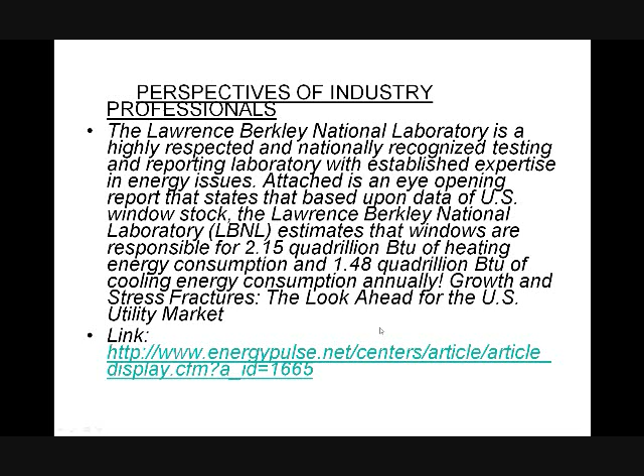Lawrence Berkeley National Laboratory is probably the most respected laboratory in the world on energy efficiency issues and windows. In 2003, they did an in-depth study and found that in the United States alone, windows were estimated to be responsible for 2.15 quadrillion BTUs of heating energy consumption and another 1.48 quadrillion BTUs of cooling energy consumption in one year. We're not talking billions and trillions like the debts and bank bailouts, we're talking quadrillions, a significantly higher number. This is a massive amount of energy loss.

ASHRAE has another way of looking at that. ASHRAE is the American Society of Heating, Refrigerating and Air Conditioning Engineers, and they do great work. What they determined was that windows are responsible for 53% of the heating loss in a building, even though they're only about 18% of the surface. So you can see a massive amount of energy loss through windows and skylights.

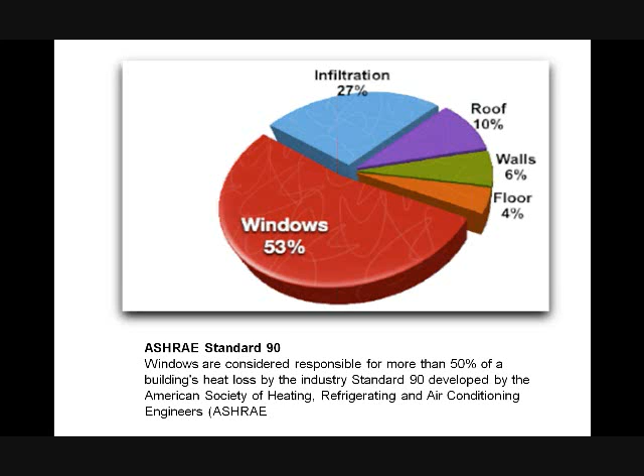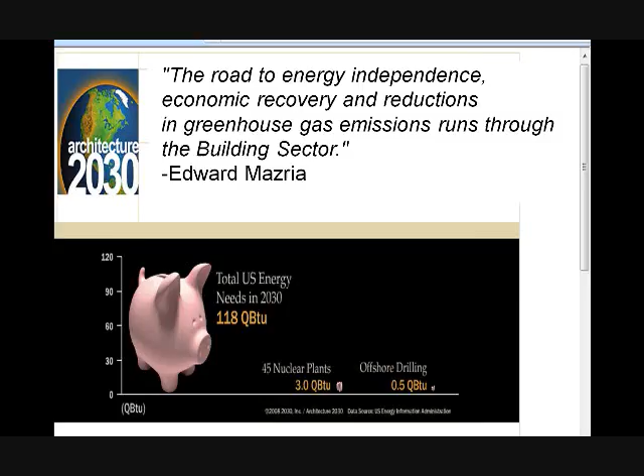Architecture 2030 is a very advanced group on energy efficiency issues, a group of architects very concerned about energy efficiency and clean air. They determined in a study that if we put on 45 more nuclear plants in the United States and doubled our offshore drilling, that would only allow us to address 3% of our energy needs by the year 2030. However, if we make our buildings and homes much more energy efficient, we can address 11 times more, 33% of our energy needs by 2030. That's why Edward Mazria, president of Architecture 2030, said the road to energy independence, economic recovery, and reductions in greenhouse gas emissions runs through the building sector. Greenhouse gas emissions are largely attributed to buildings.

What we have right now in the world is a multi-trillion-dollar wake-up call. McKinsey and Company did a survey showing that climate change initiatives will have a huge impact and create an industry worth $7 trillion. Energy efficient products like Inflector can have a major impact on carbon emissions, so by becoming part of this industry, you can become part of a multi-trillion-dollar industry.

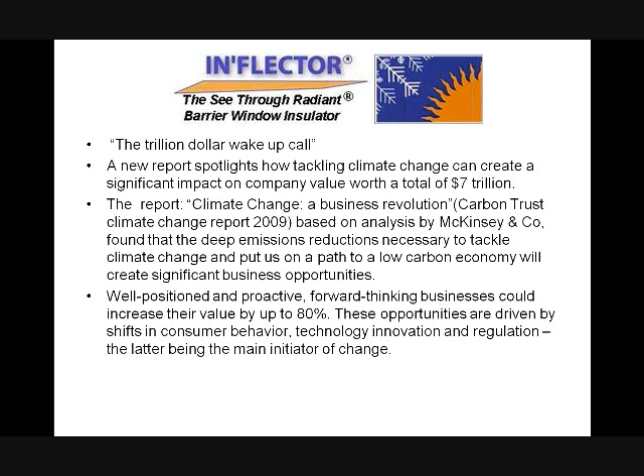The technology that we're going to be looking at today has the potential to be the primary source of energy demand reduction globally and a major source of decreased emissions. After all, the cleanest energy is the energy you conserve. Window insulators can, should, and will be a force of global energy independence.

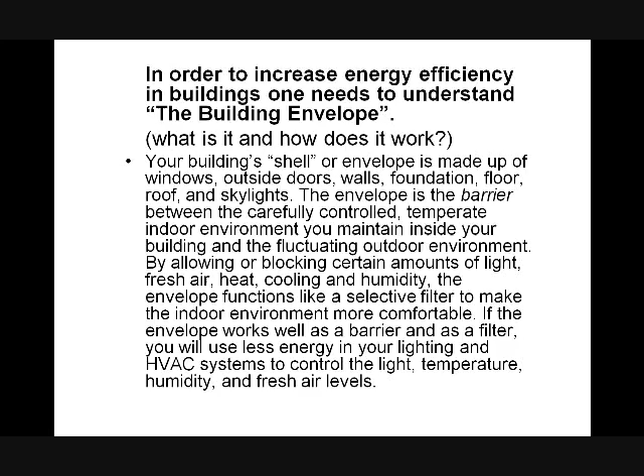The cost-saving objective is this: money in your pocket. This is a great tool that Inflector window insulators provide, simply because the building will lose heat in cold weather and gain it when it's hot outside. Your basic cost-saving objective is to minimize the cost to correct these losses and gains.

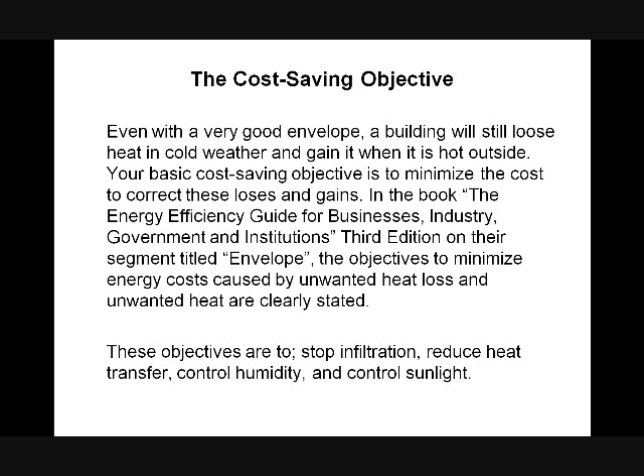According to the Energy Efficiency Guide for Business, the objective is to minimize energy costs caused by unwanted heat and loss. We need to stop the infiltration, reduce the heat transfer, control the humidity, and control the sunlight. In stopping the infiltration, we prevent the leaking in of outside air, and likewise prevent the leaking out of inside air, which you've paid to treat either through a heating or cooling process.

Reduce heat transfer, thereby minimizing the transfer of heat through the materials in the building envelope, whether it be the roof or the walls. Heat always flows from the warmer environment to the colder one, so it's based upon an R value, which is a measure of resistance to heat flow. This is sort of confusing: we have walls, attic insulation, everything rated in R value except for windows, which use U value. This is what the window industry does to confuse us. There's a formula to translate that, but in simplicity, windows have an R rating of between 1 and 5.

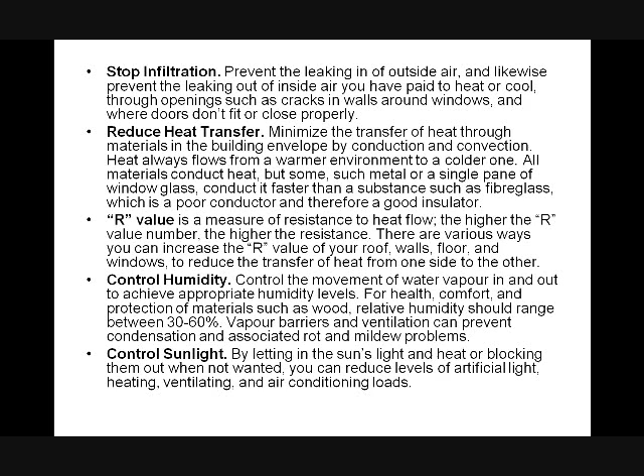Controlling humidity means controlling the movement of water vapor in and out, to achieve appropriate humidity levels for the health and comfort of our employees and protection of materials such as wood; relative humidity should be between 30 and 60%. In my opinion, the most important thing is controlling the sunlight. By letting the sunlight's heat in and blocking it out when not wanted, you can reduce energy levels. As ASHRAE Standard 90 states, we lose up to 53% of our energy through our windows.

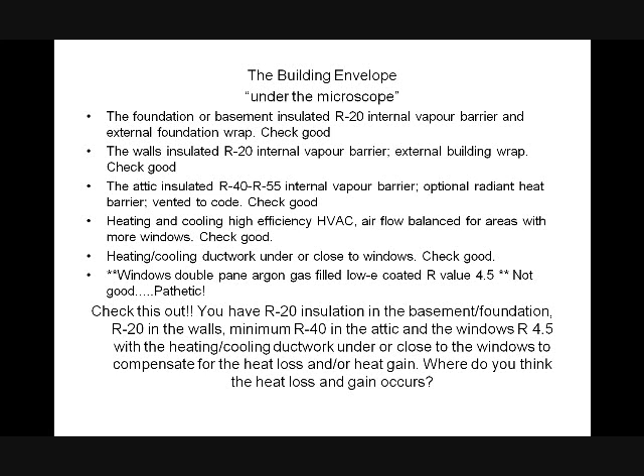Windows, R1 to R5. That's pretty pathetic. That's the weakest point in the building envelope. This is what we address with Inflector Window Insulator.

So the truth about windows is a single pane window loses 20 times as much heat as the same area in an adjacent well-insulated wall, and double glazed windows lose 10 times as much heat.

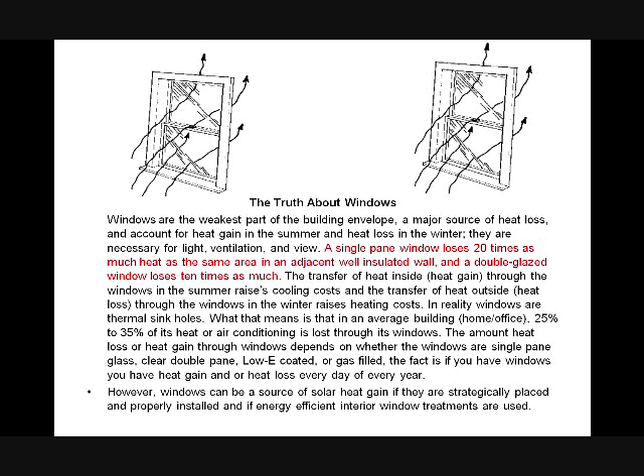Windows lose and gain heat in 4 ways: conduction, convection, radiation, which is the movement of heat as infrared energy through the glass, and air leakage, hot and cold exfiltration and infiltration. These are the ways we lose that processed air from our home or business.

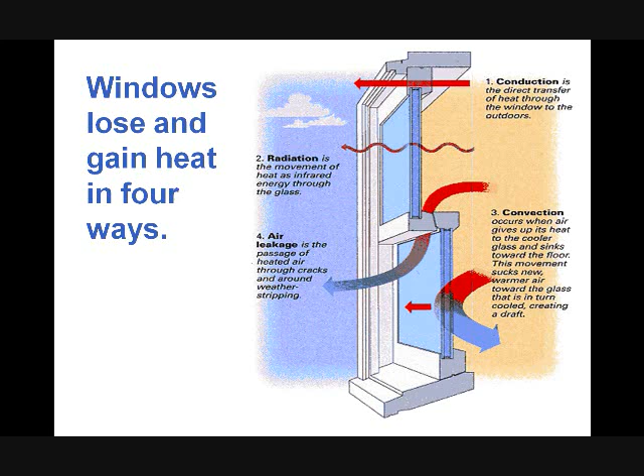So during the summertime, radiant heat comes through that window. Solar heat coming in through the window, damaging UV rays, fading furniture, your window shades, carpet, and air infiltration.

So windows provide daylight and a view. The point of having a window is to see through it, not to cover it up with a blind, a window blind. That is such a perfect statement. Why put a window blind over it when the point is that it simply is, that the point of having a window is to look through it.

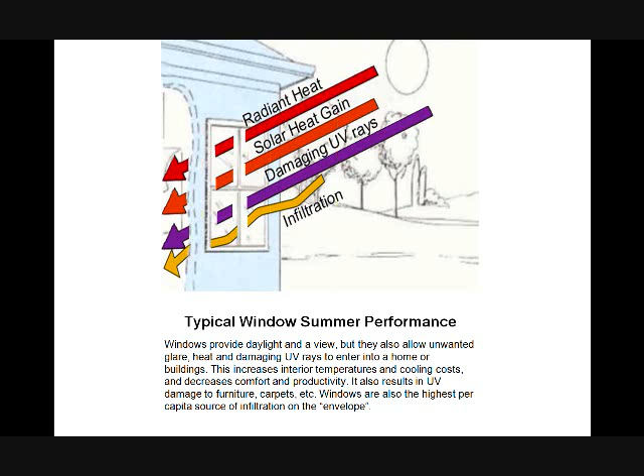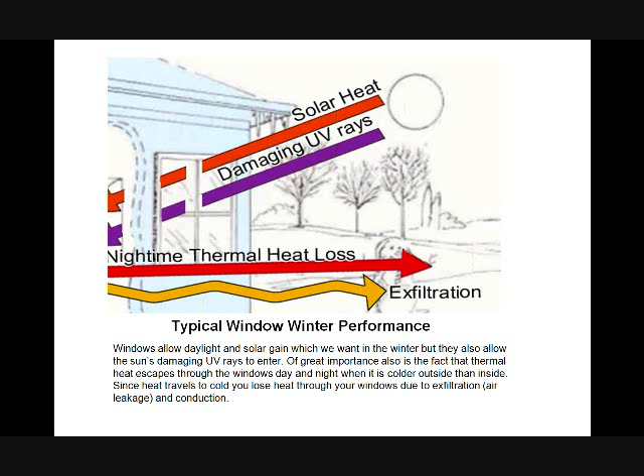So let's take a look at the objectives: control the sunlight, reduce the heat transfer, stop infiltration, and control humidity. Well, blinds and shutters, shades and curtains, well, they control sunlight some, yes.

Do they reduce heat transfer? No. Stop infiltration? No. Control humidity? No, they do not. Well, let's take a look at window film, especially from the winter perspective. Does it control sunlight? Yes, but it stops that heat from coming into your home.

This is why Inflector Window Insulators is a heat magnet during the winter. It magnifies the heat, and I'm going to show you that in just a second here. But does window film reduce heat transfer? No. Stop infiltration? No. Control humidity? No.

Solar screens: it's nothing more than having a piece of carpet over your window. I used to sell solar screens. It's a great product. We ripped over 1400 of them off of one building out at Lackland Air Force Base because, you know what, the Air Force said they weren't doing the job.

So reduce heat transfer? No. Stop infiltration? No. Control humidity? No. Not much benefit for cost with limited lifespan.

So double pane and triple pane windows, do they control sunlight? Well, no, they don't, but they do reduce heat transfer, stop infiltration, and control humidity. Inflector is the only solution that addresses all 4 by controlling sunlight.

Reduce heat transfer? Yes, Inflector. Stop infiltration? Inflector, yes. Control humidity? Inflector, yes. It is the engineered solution. With window inserts, the most comfort-enhancing, under 5-year payback, long lifespan, and UV protection.

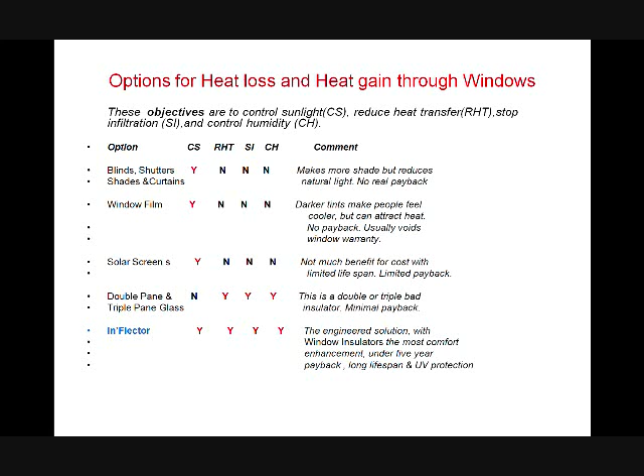So the energy efficiency done right research and development team has found that only one product worldwide effectively addresses the energy inefficiency problem, and that's Inflector.

It is a see-through radiant barrier. That's exactly, and this is more simply as you can put it, a see-through radiant barrier for windows. Again, as I can stress, the point of having a window is to see through it, not cover it up.

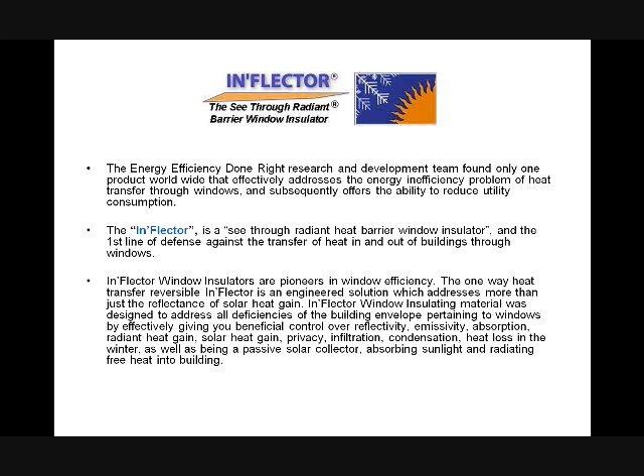So we are one of the pioneers in window efficiency. This one-way heat transfer, reversible Inflector is an engineered solution which addresses more than just the reflectance of solar heat gain. Inflector window insulating material was designed to address all deficiencies of the building envelope pertaining to windows by effectively giving you beneficial control over reflectivity, emissivity, absorption, radiant heat gain, solar heat gain, privacy, infiltration, condensation, heat loss in the winter, as well as being a passive solar collector, absorbing sunlight and radiating free heat into the building.

And this has been scientifically proven by Texas A&M University, and Dennis will get into that in a second.

So the reversible Inflector window insulating material puts three useful properties to work. Reflectivity: the reflective aluminum side was chosen first to reflect solar heat gain back out through the windows. Emissivity: aluminum has a low emissivity of between 0.03 and 0.05, meaning only 3 to 5% of radiant heat is emitted through the aluminum, reflecting heat in the direction the aluminum side faces. And absorption: the reverse black side is a passive solar collecting one-way heat transfer material, absorbing the sun's rays and radiating heat into the building, thus reducing the amount of heat.

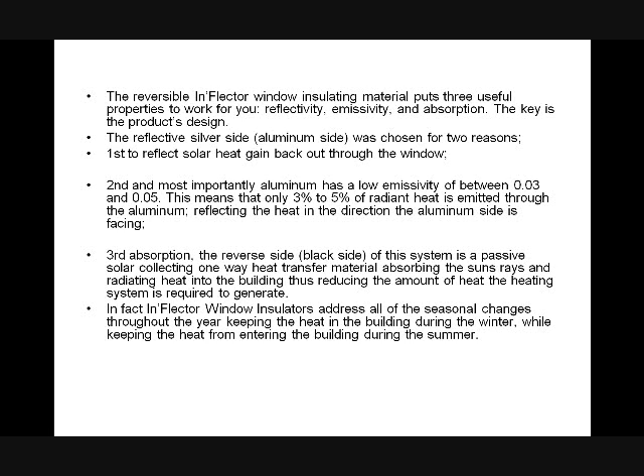How does Inflector work? In the summer configuration, it stops the radiant heat. The radiant barrier window inserts are positioned so the reflective surface faces out, rejecting 72% of the radiant heat and reducing the greenhouse effect in buildings. It reflects solar heat gain back out through the window, reducing overheating. It stops 92% of damaging UV rays, reducing sun damage. It controls glare, especially for computers and televisions, provides daytime privacy with one-way vision, provides cool daylighting with a view, and reduces the load, wear, and maintenance of HVAC units. Inflector reduces cooling demand, which reduces energy consumption, saving you money.

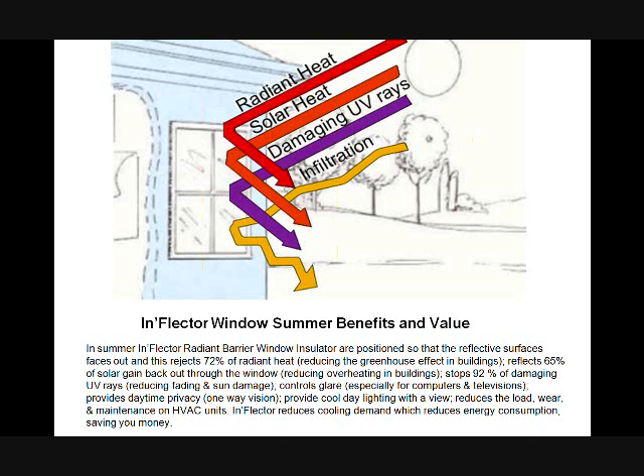According to an EDTM heat transfer test kit, heat reflected from a window after Inflector installation: the percentage of heat coming through a single pane window is 85%, a double pane is 70%, and a double pane low-E is 54%. By installing Inflector, the single pane is reduced to 17%, an incoming heat reduction of 80%. Double pane clear is reduced to 15%, a reduction of 78.8%. Double pane low-E is reduced to 13%, a 75.9% incoming heat reduction. That's amazing.

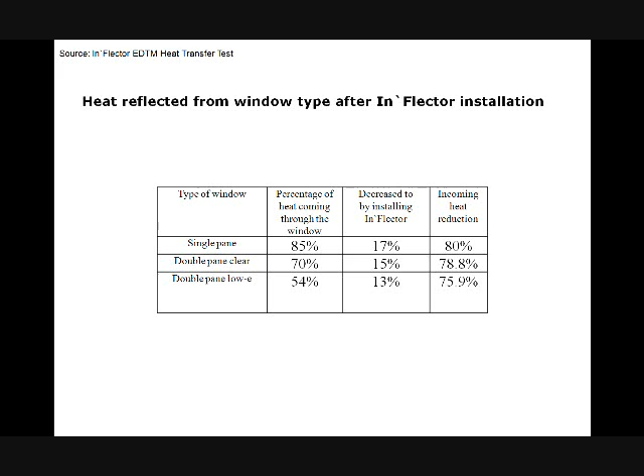So in the winter configuration, what does Inflector do? It magnifies the heat coming into your home - that's free heat coming in. The panels are reversed so the silver side faces inward. We'll show you Inflector infrared pictures from a FLIR camera where it got up to 108 degrees, magnifying the heat coming in. In this mode, the insulators reflect or magnify the thermal heat back into the building, reducing heat loss through the windows. In direct sunlight, with the black side facing outward, Inflector acts as a passive solar collector, absorbing the sun's rays and radiating heat inward.

A 4x4 window in direct sunlight can produce 2,096 BTUs of heat per hour, equivalent to a 600-watt electric heater, according to Texas A&M University. Damaging UVs are reflected back outside, and the Inflector air barrier reduces heat and air loss through exfiltration, reducing load, wear, and maintenance of HVAC systems. This is why they installed this at Security Hill at Lackland Air Force Base, over 1,800 windows, anticipating a less-than-5-year payback, or savings of $100,000 a year on that building - money going back in their pocket every year, saving the taxpayer and creating a comfortable environment for employees. This reduces HVAC load, wear, and maintenance, reducing heating requirements and costs, saving our customers and taxpayers money.

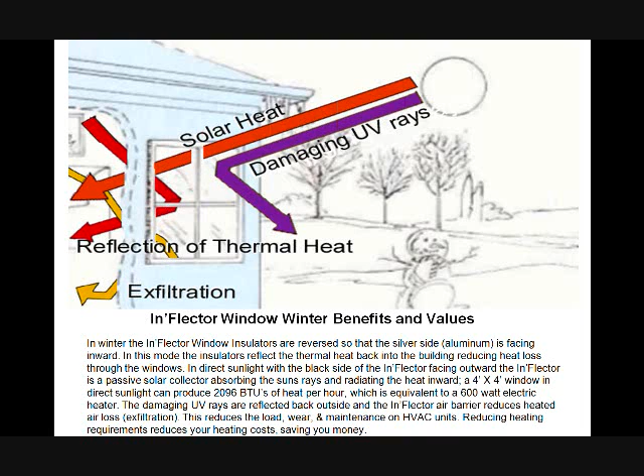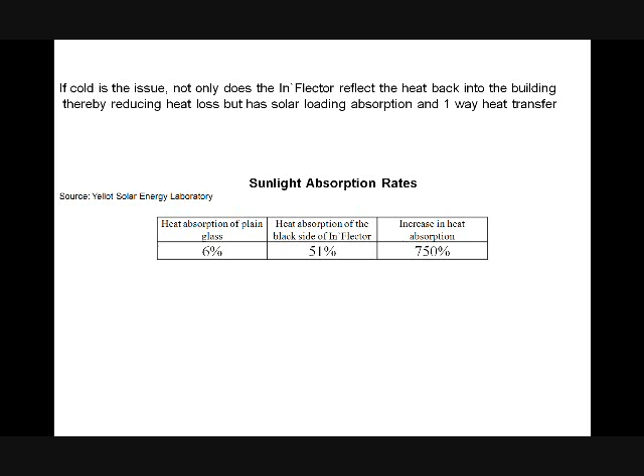So if cold is the issue, Inflector not only reflects heat back into the building, reducing heat loss, but also has solar loading absorption and one-way heat transfer. According to Yellott Solar Energy Laboratories, heat absorption of plain glass is 6%, while heat absorption of the black side Inflector is 51%, an increase of 750%. That is amazing. In fact, Inflector window insulators address all the seasonal changes throughout the year, acting as a solar collector and solar rejector while keeping heat from entering the building during summer.

This is why the Visa building in England decided to install Inflector window insulators - because they saw it does what it says.

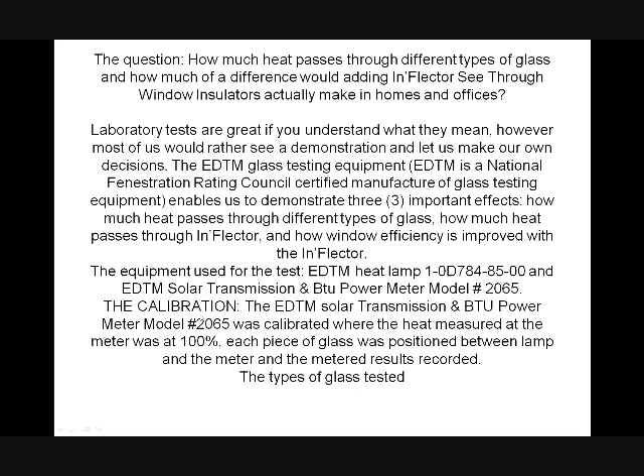So what we're going to do right now is a demonstration of a test done with EDTM glass test equipment. EDTM, based out of Toledo, Ohio, makes glass testing equipment for the National Fenestration Rating Council. We're going to use their BTU solar transmission meter and their heat lamp to test different types of glass. We've got exact copies of different glass types, and we're going to test them with this extraordinary test equipment.

So what we're going to do is test a single pane, a double pane, and a low-E piece of glass. We start by calibrating the BTU solar transmission meter so it reads 100% of the heat from the sun coming through the glass. Then we introduce the single pane piece of glass, and with regular single pane glass, only 15% of the heat is stopped - 85% of the heat still passes through in either direction.

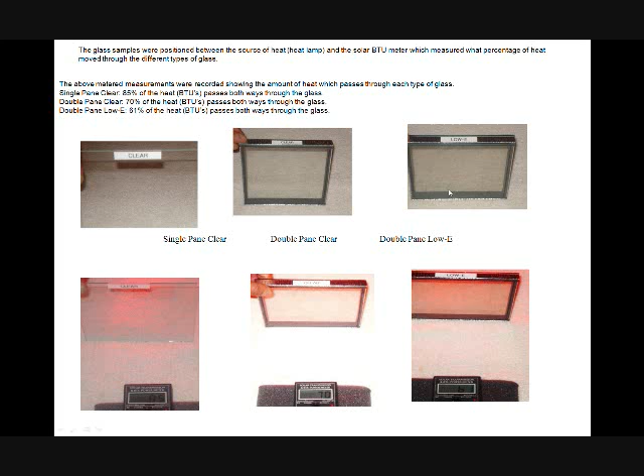With the double pane, 70% of the heat passes through in either direction. Remember, heat goes to cool, all the time heat goes to cool. So when heat is inside the home or building, it's trying to get out, and when heat is outside, it's trying to get in. Glass will stop it in either direction. With a double pane low-E glass, 61% of the heat still passes through in either direction - that's why you see so much heat being lost through windows.

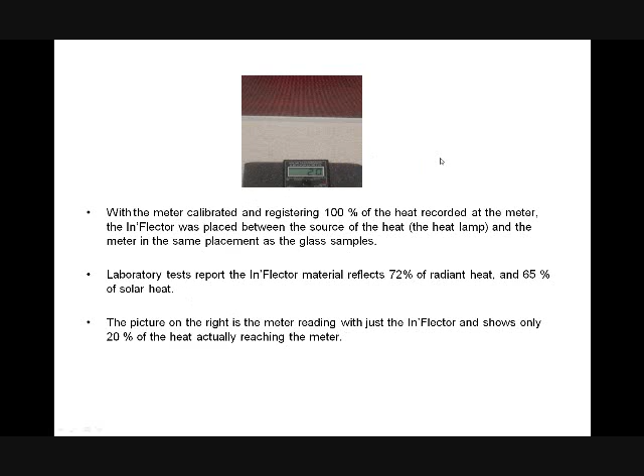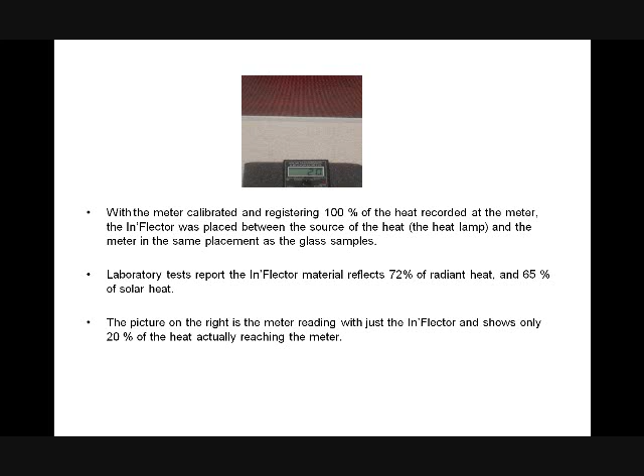Now we're going to test the In'Flector. In'Flector does not work alone, it works with glass. But all by itself, using the EDTM equipment, we see that In'Flector stops 80% of the heat - 80% all by itself.

Now we can see what happens when we add the In'Flector in with the different types of glass. With the In'Flector on a single pane, we go from 85% of the heat passing through to only 17% passing through. With a double pane, you go from 70% down to 15%. With double pane low-E windows, you go from 61% down to 13%. That is an amazing test. So what we can clearly see is the In'Flector added to any window or skylight would immediately substantially reduce heat gain or heat loss.

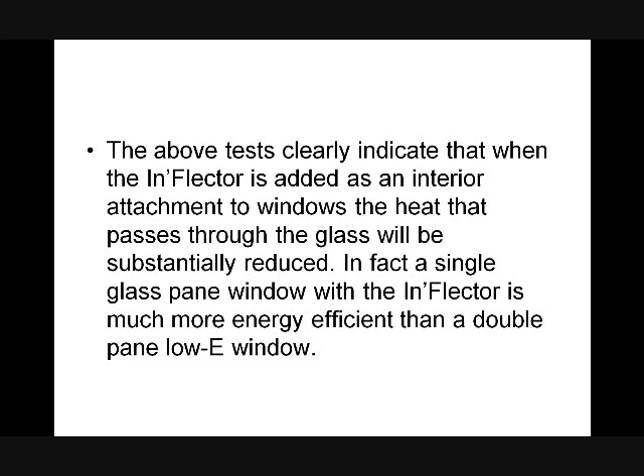How much so? Well, let's look at that same information graphically.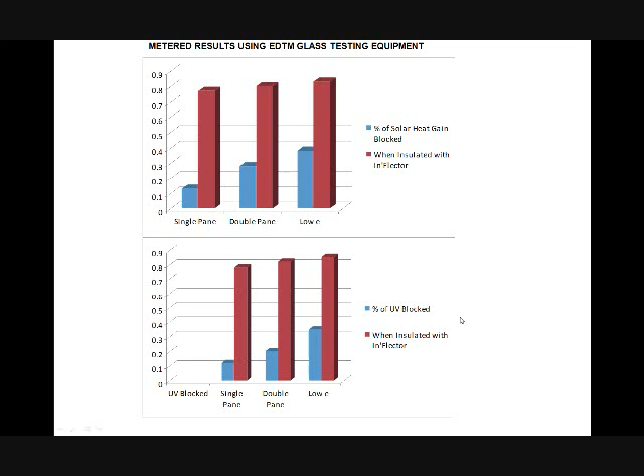Okay, I'm going to take a question because it does address this. Can we briefly discuss the selling and pricing process? I certainly can, but it's going to be more appropriate that I get into that at another point in this presentation, so I will address that information later.

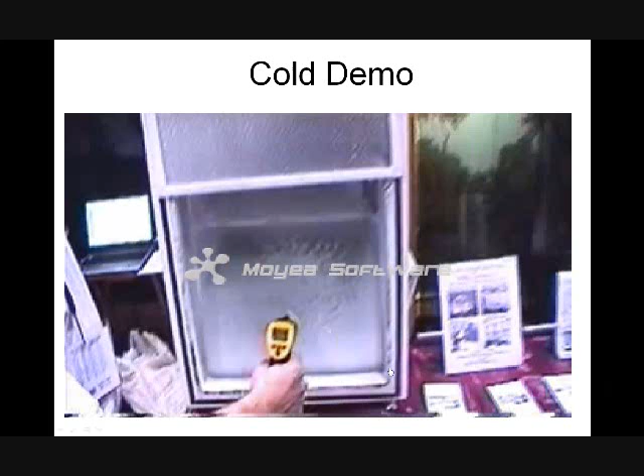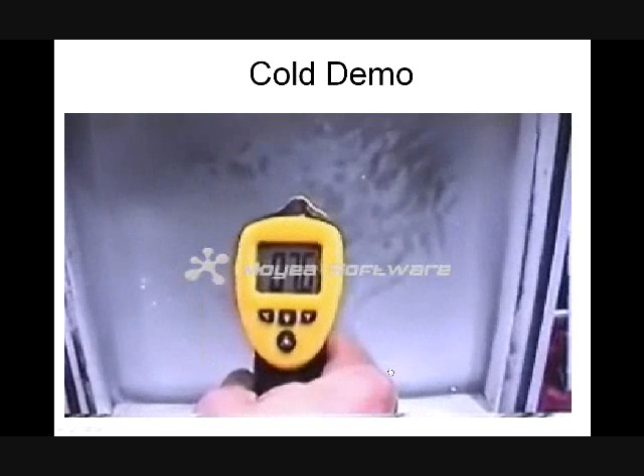Now I'd like you to look at a little demonstration. This is a cold demonstration. What we've done is taken a freezer, and where the door is, we've removed the door. Where the inside of the door would be, we put a piece of glass, and where the outside of the door would be, we put in a piece of Inflector. Now what we're looking at is a Celsius reading of minus 7.5 degrees.

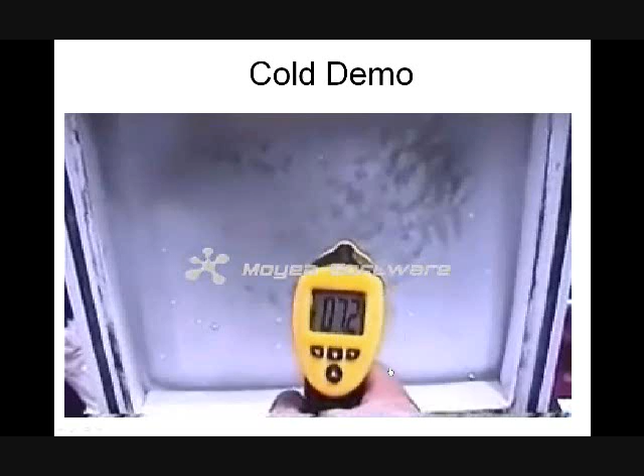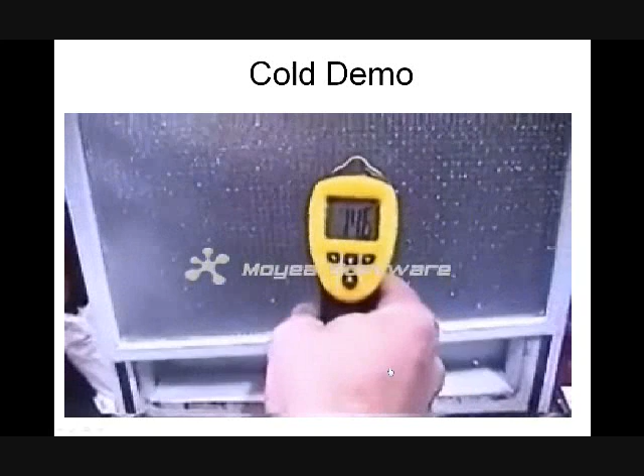Now we're introducing the Inflector. Immediately it goes from minus to plus — a massive change. So remember, your heat is going up against this cold glass. Now we're putting a barrier between the glass. Again, below minus 7.5 degrees Celsius, let's introduce the Inflector. Immediately, a difference of about 25 degrees Celsius, which is about 50 degrees Fahrenheit.

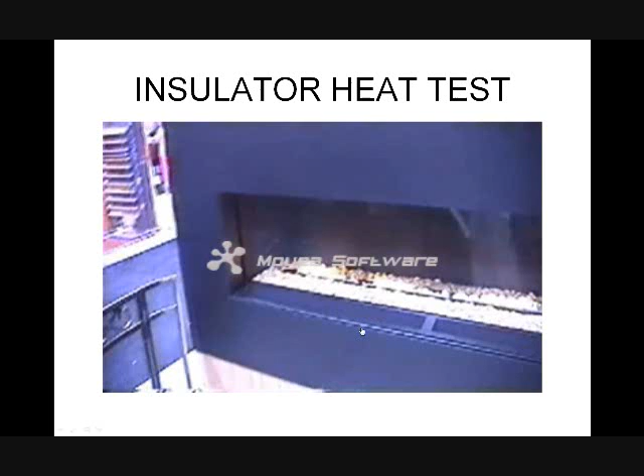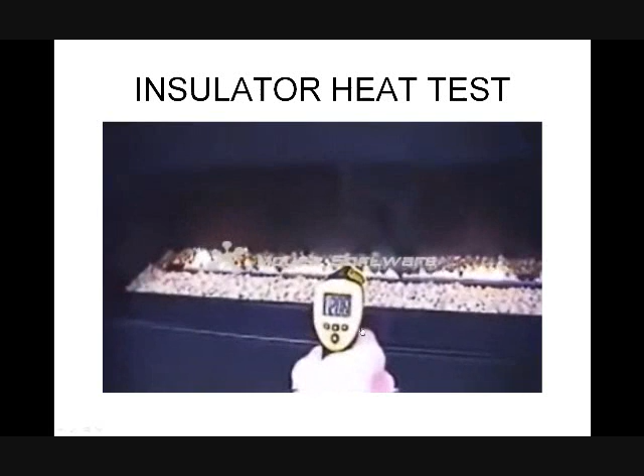Now we're looking at a hot weather test. What we have here is a furnace. We're going to take our EDTM laser-pointed temperature gun and aim it toward the heat. What we can see is over 200 degrees Fahrenheit. We're on the Fahrenheit scale since we have customers in both the United States and outside the United States.

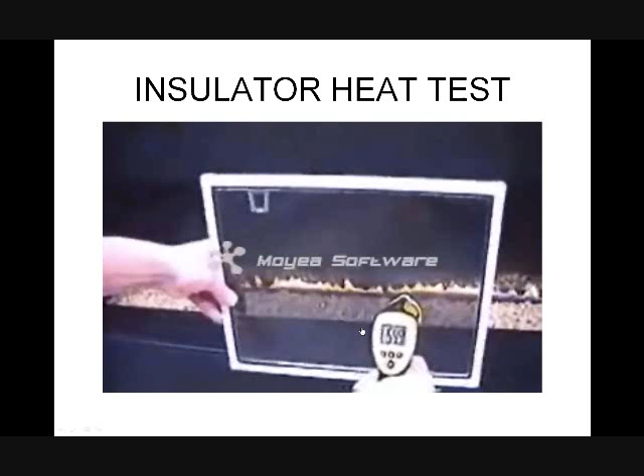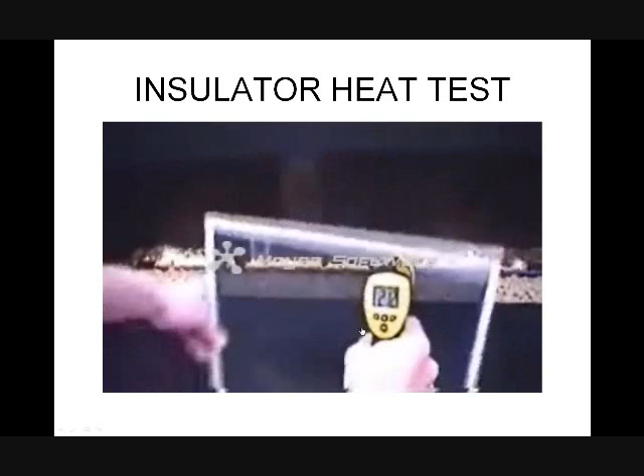Over 200 degrees Fahrenheit. Now introducing the Inflector. Boom — how about 55 degrees Fahrenheit, 58 degrees. How about around 150 degrees difference by putting the Inflector between the heat and the inside source. Now that is a heat barrier demonstrated.

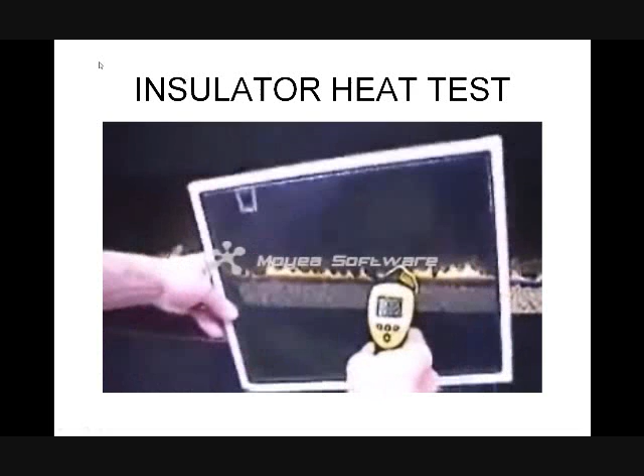So now let's talk a little bit about infiltration. What has been determined is building air leaks in homes and buildings is an extraordinary cost. It is a critical factor in energy loss in buildings, and according to the University of California, Berkeley, it merits a lot of consideration. They say energy loss due to infiltration can be 6 to 9% of the total energy budget of the United States.

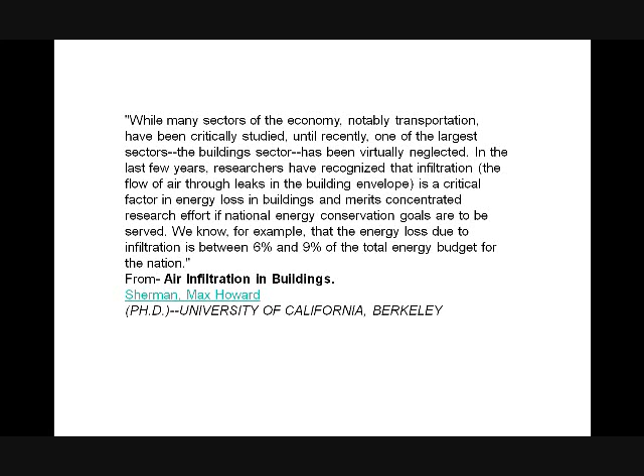6 to 9% is from infiltration, air leakage into homes and buildings. And guess what — most of that loss comes through the windows, because the windows most of the time don't have a seal on them. So what we have here is a letter from the National Defense Medical Center in Ottawa, Ontario. This building had an extraordinary amount of leaky windows — they knew that from a test. So they wanted to see if Inflector would help those air leaks, and also wanted to survey the people who had Inflector in their offices once it was installed to see how they liked it.

So out of all these windows, they insulated 200 with Inflector insulators, and then they did a test. What you'll see in this letter is that the results were very positive, and remarkable improvements were noted in the air leakage behavior of windows after installation of the Inflector insulators. Then they did a survey of the staff, and found that the insulators were highly recommended by the people who had them in their offices. The administrators said they wanted to have the whole building insulated after this test.

So again, amazing results. Inflector radiant barrier window insulators are the world's most complete window and skylight insulators. Inflector insulators deal with all the goals of solar enveloping and additionally have a solar collection benefit. So let's look at what some different kinds of tests have shown.

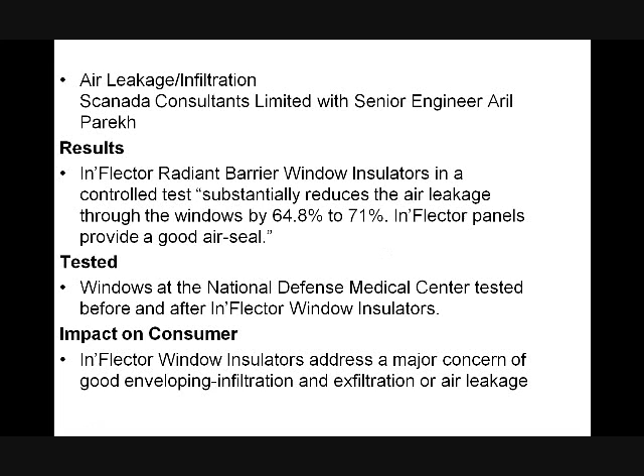These are all independent tests about different problems with windows. The letter you just saw was from the test conducted by Scanada Consultants Limited with senior engineer Aril Parekh. The test said that the Inflector substantially reduced air leakage through the windows, by up to 71%, from 64.8% to 71%. Their comment: Inflector panels provide a very good air seal. So what we have is instantaneous improvement on something that could amount to 6 to 9% of the energy cost, which is infiltration.

Yellot Solar Laboratories, an independent lab, tested the solar collection benefit of the inflector. They found that in direct sunlight, a 4-foot square window insulator can create heat of 2,096 BTU per hour, equivalent to a 600-watt electric heater. So for each 16 square feet of glass, you get the heat gain of one 600-watt heater. Four windows means four 600-watt heaters worth of free heat.

Now the real bonus is in the cold. Instead of losing heat through the window, you're totally turning that around and gaining heat. So it's a double gain: heat that you don't lose, and heat that you gain.

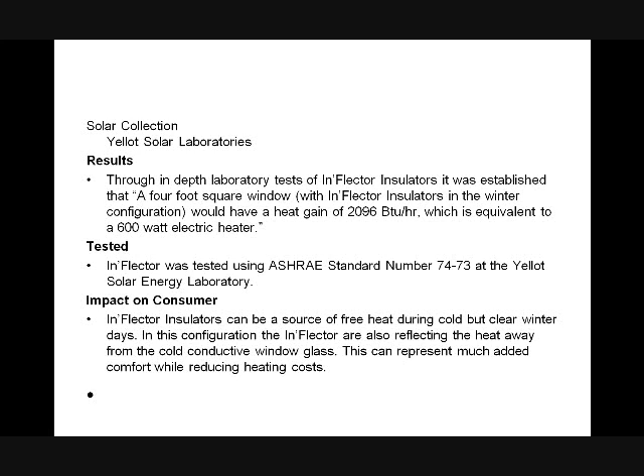Texas A&M tested the insulating ability of the inflector. In a study called 'Inflector Solar Screens on Thermal Properties of Windows,' they found the U-value, the insulating value of windows, improved by 54% for winter conditions and 50% for summer conditions. So by adding the inflector, you immediately increase the insulation value of each window by half again, while doing all these other wonderful things.

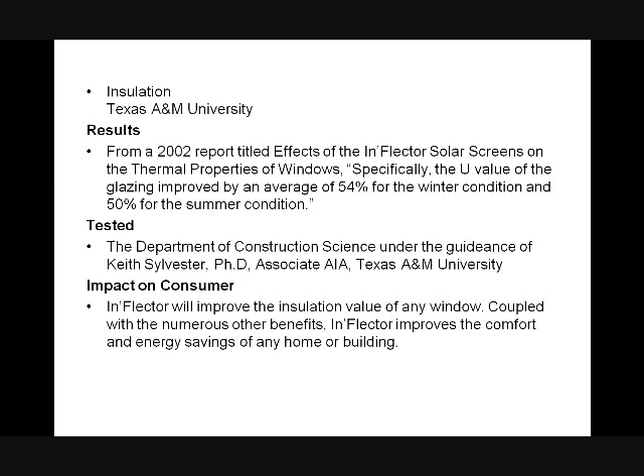Northwest University in South Africa tested the inflector, comparing energy loss in insulated versus non-insulated windows. They took 3 similar offices: one got inflector panels, one got inflector roller shades, and the third had no insulator. After a carefully documented test, they found the insulated offices had an average of 30% less energy use than the uninsulated office. That's dramatic.

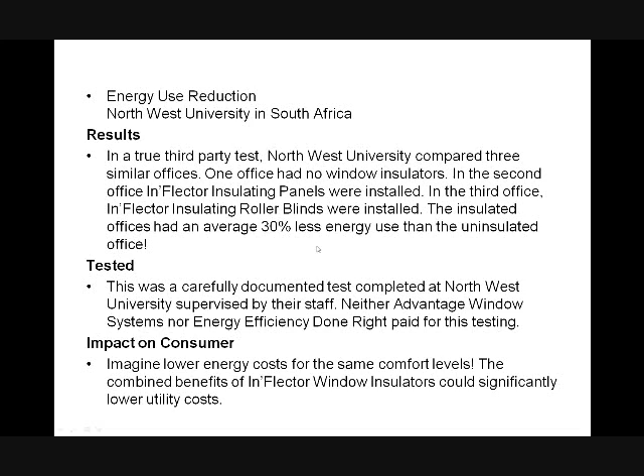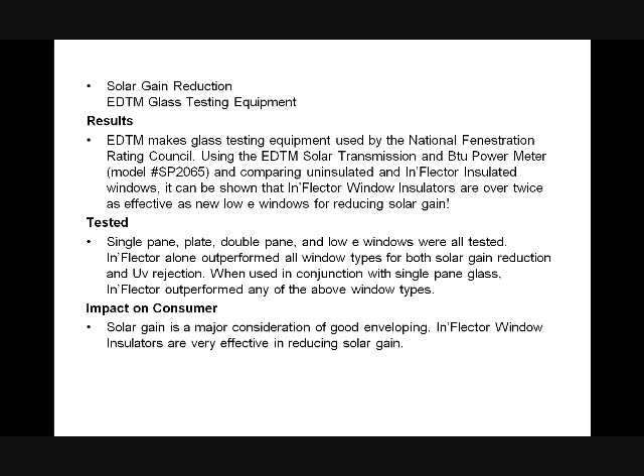Solar gain. We used the EDTM test a little while ago, and what you saw is comparisons showing we dramatically improved performance for reduction of solar gain, no matter what type of windows you have. Solar gain, particularly in extremely hot weather, is a tremendous problem—solar and radiant heat gain. Nothing will improve an existing glazing like the inflector window insulator.

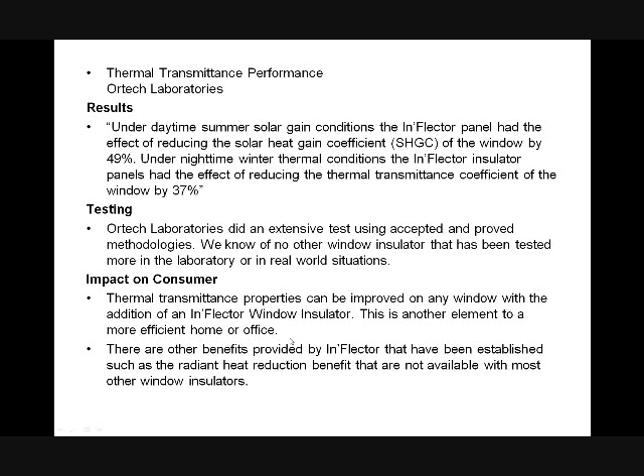Ortech Laboratories did an in-depth test on thermal transmittance properties. Under daytime summer solar gain conditions, they found inflector insulators reduced solar heat gain by 49%. During nighttime thermal conditions, inflector reduced the thermal transmittance coefficient by 37%, keeping cool air in besides keeping hot air out. This shows the thermal transmittance properties of any window can be improved instantly by insulating the windows.

Now let's go to some infrared pictures. This picture will definitely show the insulating properties of the inflector. On a day that was 13 degrees in Maine, we took a picture from outside of a window. It was 13 degrees outside, and the outside window surface temperature was 16.3 degrees.

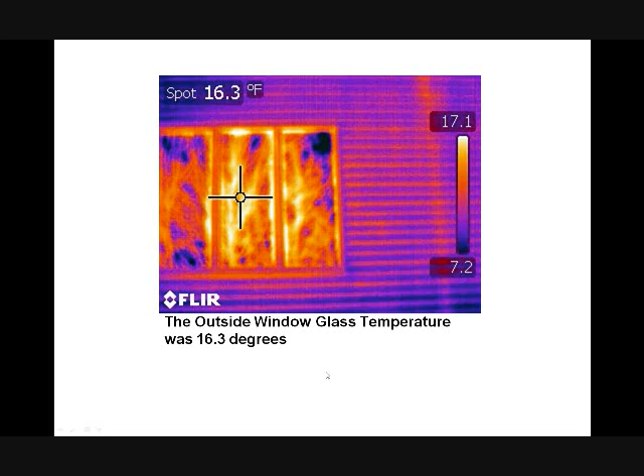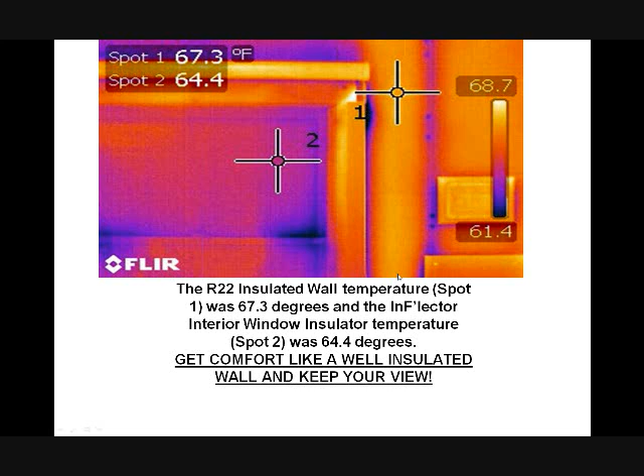Now let's go around to the inside of that same window. It's 13 degrees outside. We have two temperature points on this thermal image: temperature 1 is the wall at 67.3 degrees. Even though it's 13 degrees outside, and the outside surface temperature of the glass is 16 degrees, the temperature inside on the inflector is 64.4 degrees Fahrenheit—within 3 degrees of the inside wall temperature between those studs. What you're basically getting is a well-insulated window similar to a well-insulated wall.

This study was sanctioned by the National Fenestration Rating Council, on one of whose committees I served. It studied window performance for human thermal comfort. Intriguingly, it found that the number one reason people are comfortable or uncomfortable in their home or office relates to their windows. How close they are to windows relates to their comfort level, and windows influence comfort in a number of different ways.

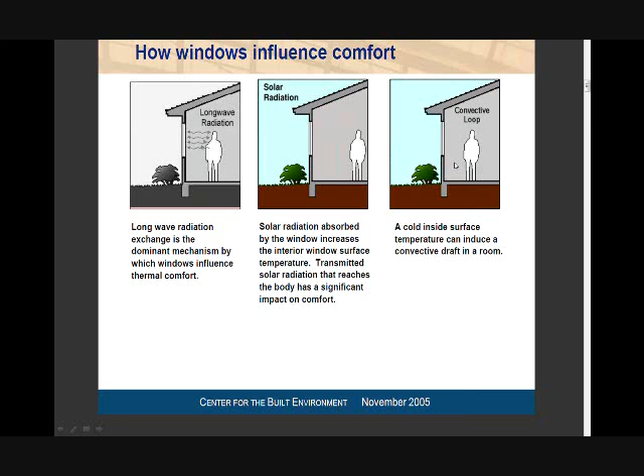During the summer, longwave radiation is the primary dominant mechanism by which windows influence comfort. Also, solar radiation absorption and re-radiation affect comfort. During the winter, the major concern is convection loops created by cold outside temperatures and warm inside temperatures. All of these things are substantially improved by adding Inflector window insulators.

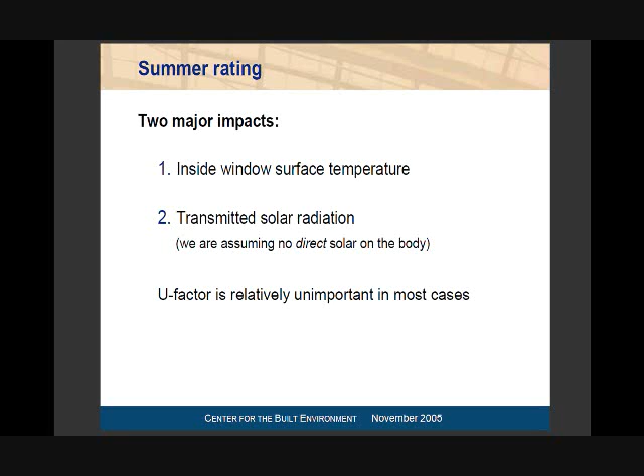During the summer, the two major impacts for comfort are your inside window surface temperature and your transmitted solar radiation. In the summer, U factor is not that important, but on these two major impacts, nothing affects them as much as Inflector. We substantially improve the inside window surface temperature and substantially reduce the transmitted solar radiation.

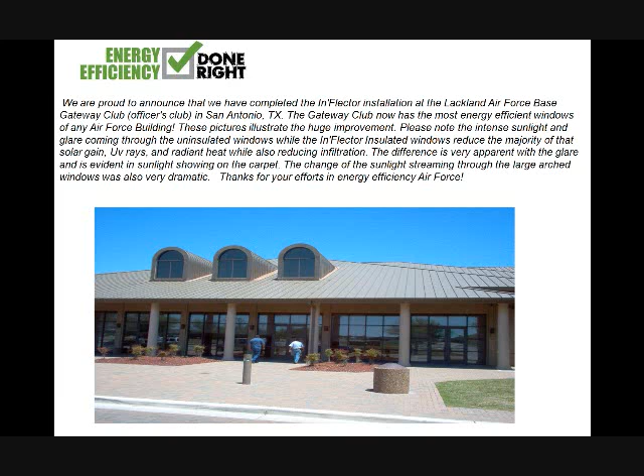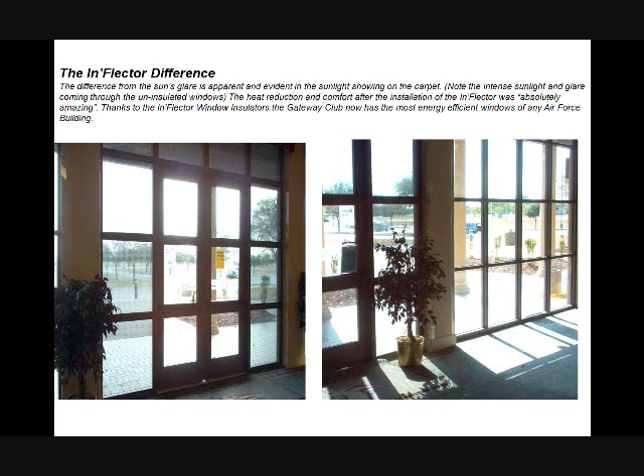Another important point in this picture: all this heat coming through will bleach the color of the carpet. But even worse, that's what you call greenhouse heat. All the heat absorbed by materials like floor carpet or draperies is re-radiated as long-range waves. It comes into the glass as short-range waves but is re-radiated as long-range waves, and long-range waves are opaque to glass. Glass is like a wall for long-range waves, so the heat gets trapped inside the building - that's greenhouse heat.

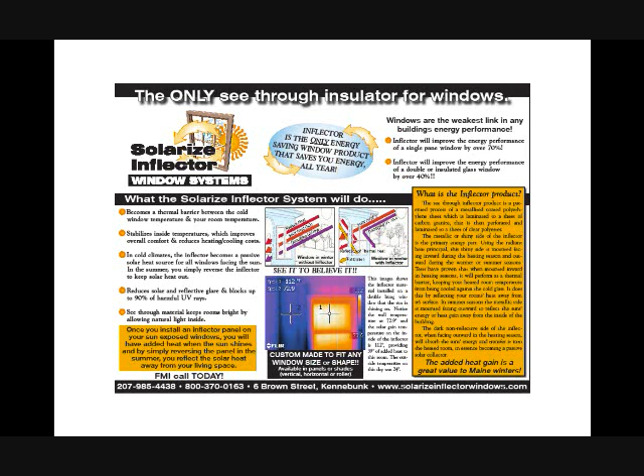Over 70 degrees, let's see, we're going from 112 to 40, yeah, 72 degrees of improvement that your heating is hit against. So now you can see why your heating works much less hard with your In'Flector.

Now we're going to get down to the packages. People were talking about the pricing on the packages. We've got manufacturing packages, dealer packages, and sub-manufacturing packages. But here's the main thing: you can be a leader in a very important category of energy efficiency by coming on board with In'Flector as a dealer, a sub-manufacturer, or a manufacturer. You'll actually be making the products.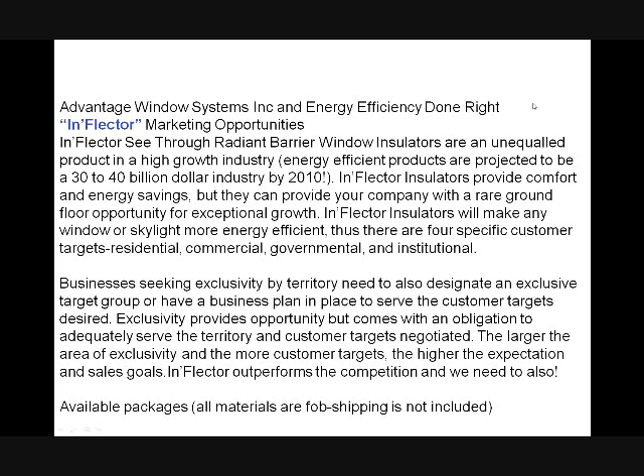Dealer package started under $3,000. A full-blown manufacturing package is under $60,000, but it includes manufacturing components and material, tens of thousands of dollars worth of supplies, and you can be in business in a very strategic category of energy efficiency.

Again, the dealer package, what people were asking about, has a lot of components, including the glass test kit, demo kits, master dealer manuals, and an actual In'Flector to install in your home. For under $3,000 you can be in business as an In'Flector dealer.

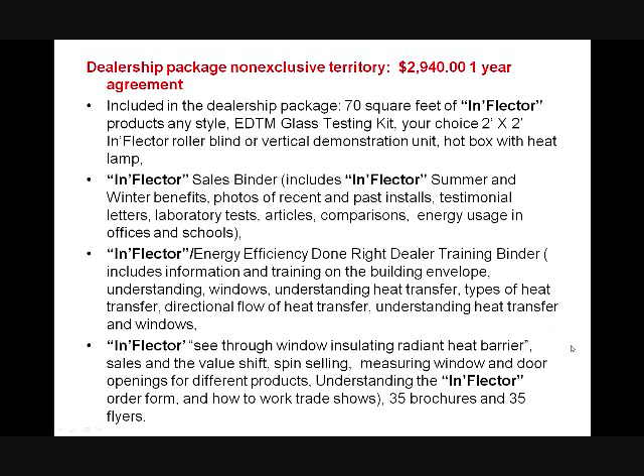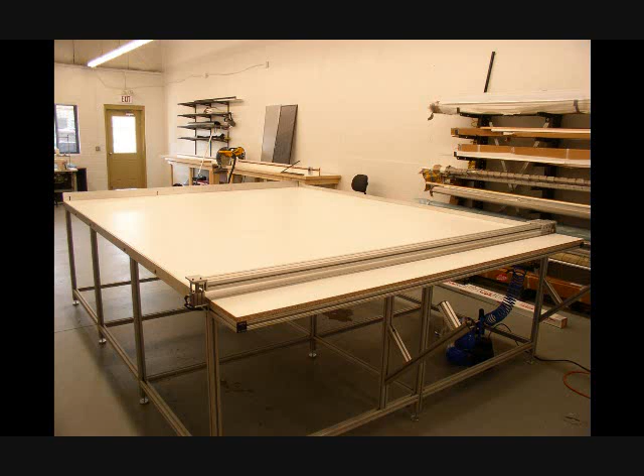Again, different package levels are available. This is the manufacturing table that comes with a manufacturing package, actually 10 feet by 8 feet. It's got a hydraulic arm that comes up and drops to hold the material, to cut it nice and square. You can see a setup of a potential manufacturer.

You need under 1,000 square feet of space to be a manufacturer of the In'Flector. Manufacturing is too complex a word, really it's just assembly. None of it's complex, it's not like building a gas engine, it's just putting some parts together. In the back you can see the saw that's used for cutting frame.

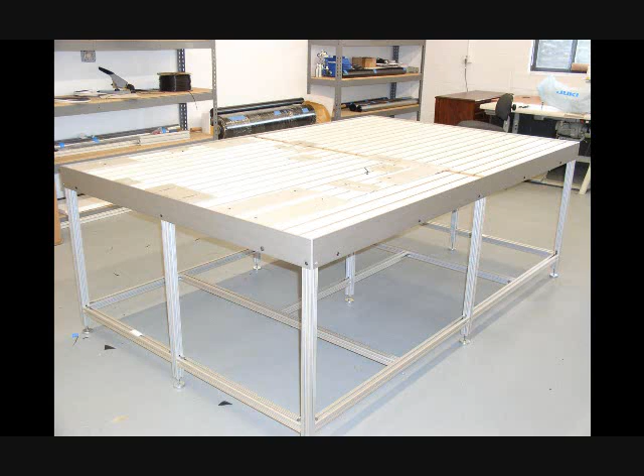This is the panel assembly table, and you'll see a roll of In'Flector in the back behind it. With this panel assembly table, you can assemble beautiful In'Flector panels that are going to really help people out.

So here's a few things to consider. On a U.S. level, energy loss through windows is over $25 billion a year. That's energy equivalent to all the energy we get from the Alaska pipeline, lost only through windows. We're only talking about energy loss through windows.

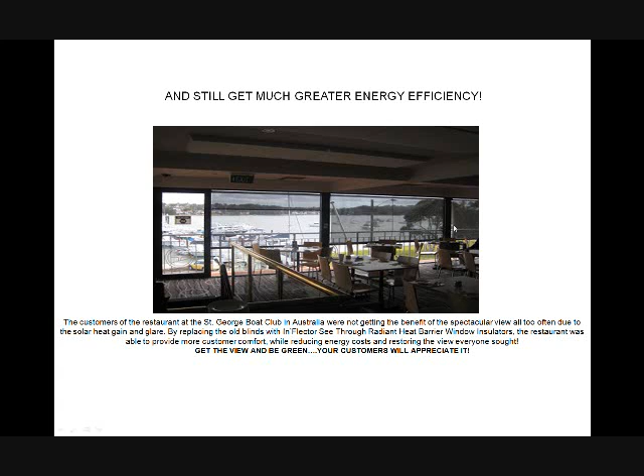Now when we add the In'Flector, this is the view you can get. The picture before had no energy efficiency and no view. Now we have energy efficiency far, far better than the other one, plus a nice view. People can get right up close to the windows without the heat and without the glare and still have a great view. This is what people really came to that restaurant for, the view they weren't getting through the Venetian shades.

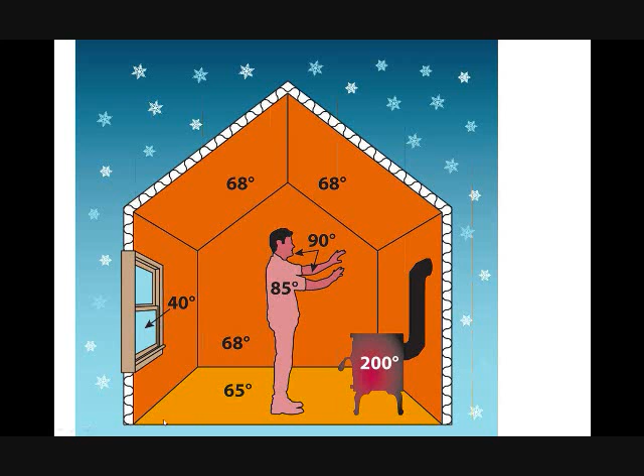Two more thoughts I'll leave you with, then we'll go right to questions. This is a picture from the EPA, and what it tells us is very evident. Looking at this picture, where is your energy loss? Everything is very consistent on this thing except, guess what, the windows. Everything in the building envelope is going to be comparable to the thermostat temperature, but the windows are going to be relevant to the outside temperature. Let's insulate those windows and make them comparable to the inside temperature rather than the outside temperature, and stop that 50% of heat loss that goes through the windows immediately.

Now this is very, very important. If I can leave you with one thought, this is it: almost half of the total energy produced in the developed world is inefficiently used to heat, cool, ventilate, and control humidity in buildings.

To meet the increased high thermal comfort levels demanded by occupants, the utilization of advanced materials and passive technology would substantially reduce energy demand. What is In'Flector? It's a composite advanced material, a passive technology. It doesn't cost anything to run. It works once you put it in, very effectively, for as long as you have it. Half the total energy is lost by buildings inefficiently, and we can dramatically change that, affecting energy loss more than anything else in the world.